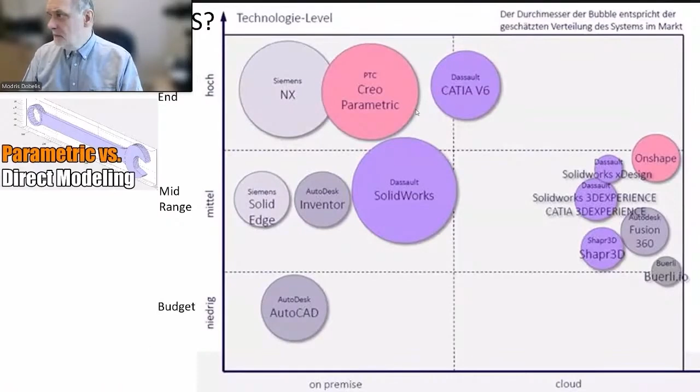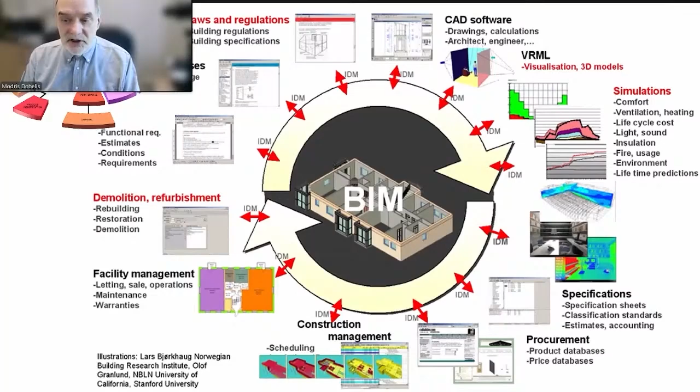Concurrent engineering SolidWorks performs like BIM, using a single shared model for real-time cooperation, coordinated updates and conflict detection, what engineers generally call PLM, product lifecycle management.

The widespread adoption of practical application of PLM and BIM models across engineering disciplines will not only streamline design and collaboration, but will also fundamentally shape how products are developed, managed, and brought to market, ultimately defining the future of industry.

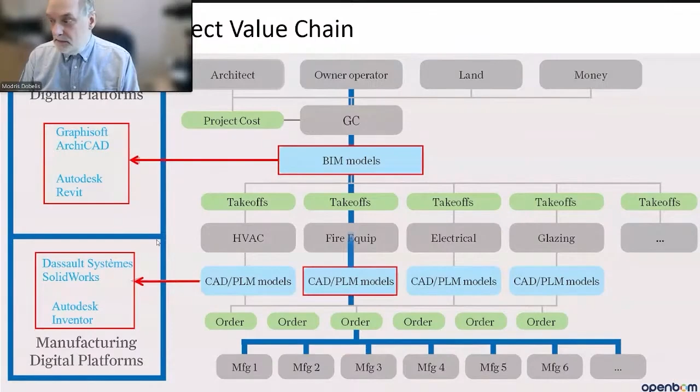At RTU, we use SolidWorks to introduce students to the cause and effect relationship between design decisions and real-world performance. Every modeling choice, dimensions, constraints, symmetry, or simplifications has consequences later in analysis, manufacturing, or operation.

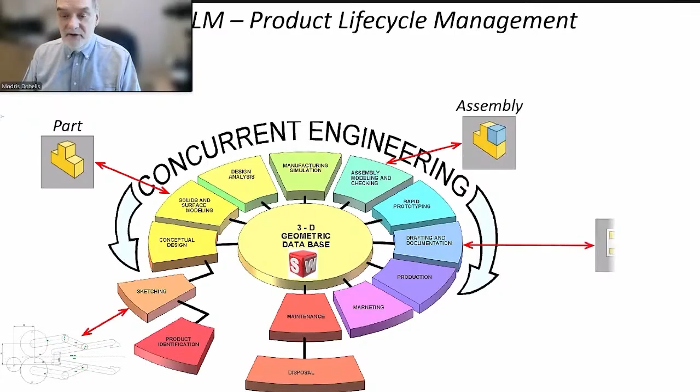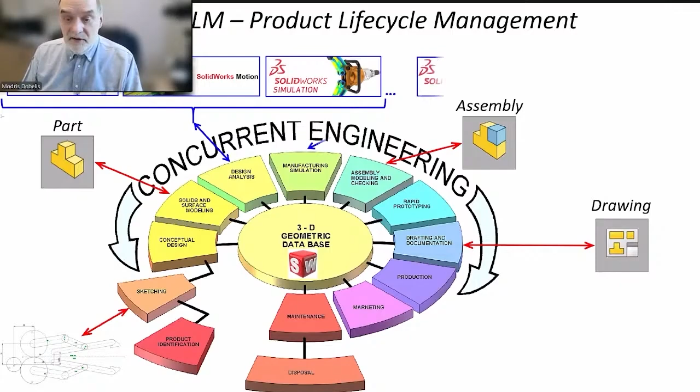Another key reason for using SolidWorks is continuity. The same model created in a basic CAD course can later be reused for structural analysis, flow simulation, and parametric studies. This allows students to understand that engineering is not a sequence of isolated subjects, but a connected workflow where modeling, simulation, and validation are tightly linked.

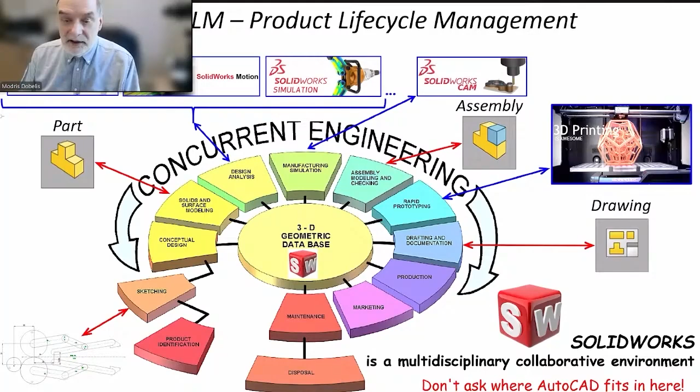Finally, SolidWorks is widely used in local industry, which makes it an effective bridge between academic and real engineering practice. Students are not only learning concepts, they are learning them in an environment they are likely to encounter again in their professional careers.

The introductory overview course is offered to about 200 students each year across 6 study programs. Students first encounter fundamentals of engineering graphics and the basics of SolidWorks.

In the advanced course, the focus is on parametric part modeling, assemblies, and documentation. Advanced SolidWorks I deliver to 60 students, and this course follows a detailed prerequisite course on engineering graphics. Here students, along with SolidWorks, progress to learn assembly, structure, and design intent, proper use of mates and constraints, and engineering drawing that follows standards and manufacturing logic.

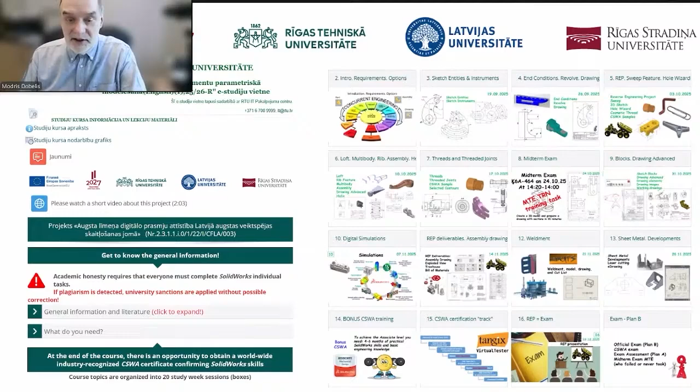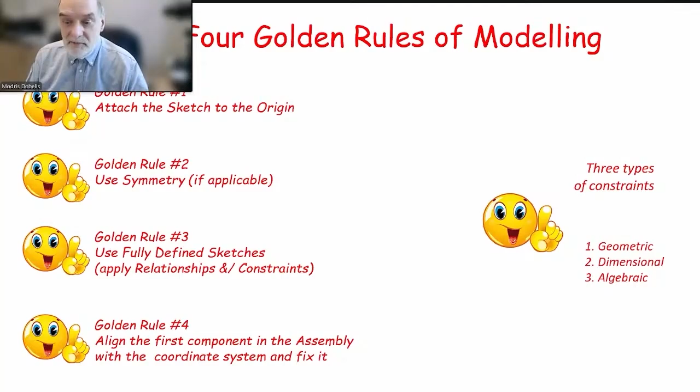A key transition happens when students move from simply creating geometry to understanding why a model is built in a certain way. Here emphasis is placed on model robustness, clear feature structure, and future use of the model for simulation and modification. This approach intentionally prepares students for later courses where the same SolidWorks models are not rebuilt from scratch but extended into analysis and simulation tasks. In this way, SolidWorks becomes a continuous learning platform rather than a one-time software skill.

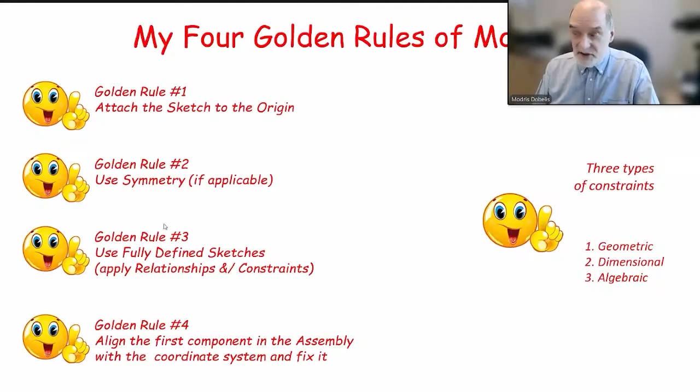I use the following teaching method. Practical exercises are conducted simultaneously in 2 computer labs of 30 seats each, as RTU does not have a single lab with 80 to 100 seats, unlike a friend of mine, a professor in Germany.

I present short theoretical concepts in PowerPoint, stream them to the second lab via Zoom, and record them for later review. Both labs have 2 large screens, and in the second lab, a colleague assists me.

I use a flipped classroom approach. The students are required to watch instructional videos before the session and then work independently in class on exercises.

I manage the computers in both labs using Veyon software, taking control whenever a student encounters a problem to demonstrate the solution. Usually, if one has the question, several others do too. Then I take control of the student's screen and share it on both classes, demonstrating the solution without wasting time to walk to the student's seat.

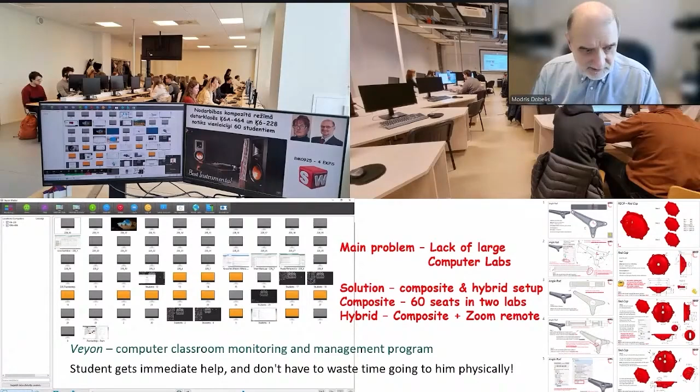Something is wrong with... so here is the class I showed before, and somehow the synchronization doesn't work well for me. Sorry.

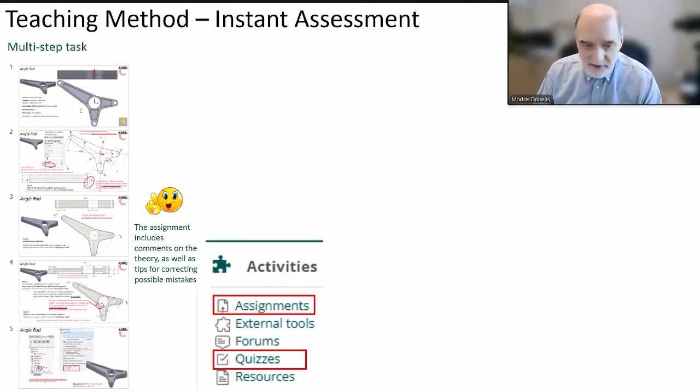Final goal for the task they have to master is to prove control over the design intent. In the first, easiest step, students are given typically 4 answers, and they have to choose the correct one from the 4. Those who are not patient may submit the solution, but they just get partial credit.

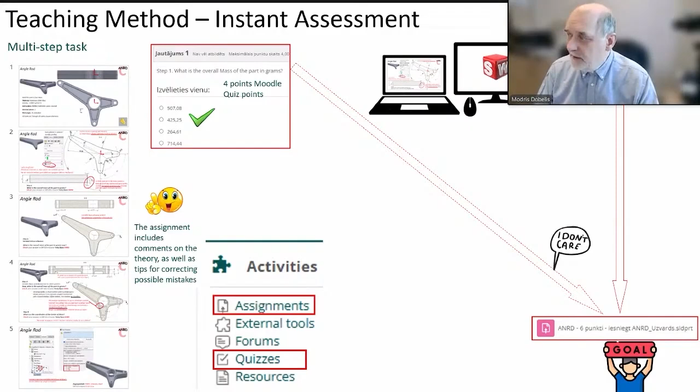For the serious students, they need to work constantly on this problem in several steps to solve the problem by themselves. The goal is to let the students practice to master design intent by themselves. The Moodle quiz serves purely for self-assessment. The teacher is built into this Moodle system.

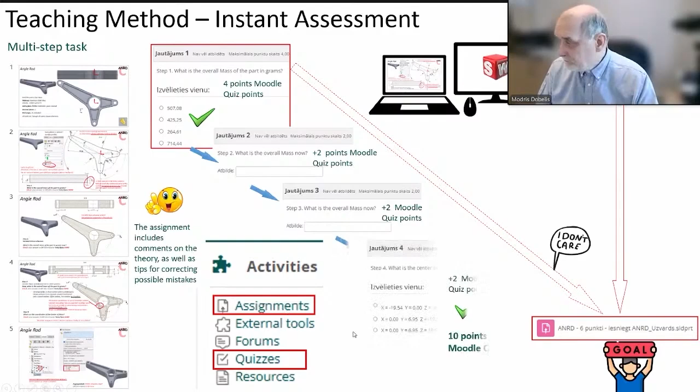At RTU, SolidWorks is primarily used for learning and concept understanding. Models are simplified, assumptions are discussed, and results demonstrate just basic principles. In industry, models are more complex and must be robust, reusable, and clearly documented to support simulation, manufacturing, and decision-making.

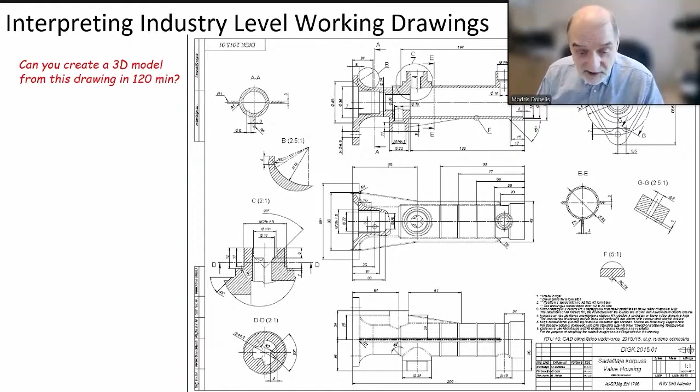Historically, industry representatives have sometimes complained about our graduates having poor skills in interpreting mechanical engineering drawings. Partially, it was caused by decades of limited funding for PCs and CAD software, as well as university curriculum changes after Latvia regained independence. 10 years ago, we still held so-called CAD Olympic contests to challenge students with more industry-like tasks. But today, such contests are too complex to run at all.

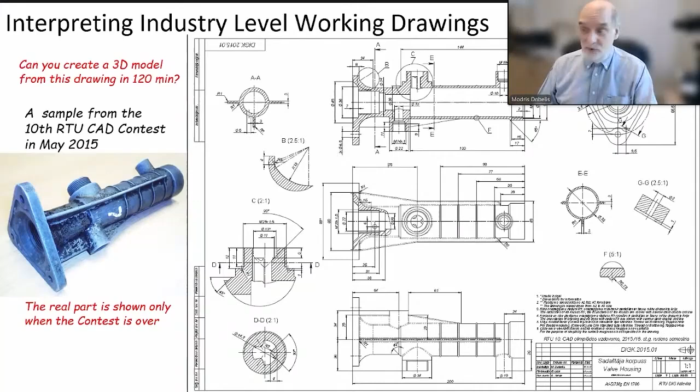To extend the impact beyond the university, the current course is being duplicated on an open MOOC platform. Its purpose is to lower the entry barrier, spark interest, and guide motivated learners toward more advanced lifelong learning programs. At the university, they have to subscribe for these later.

In recent years, RTU has organized free introductory courses with several EuroCC project initiatives. These courses are not only focused on CAD skills, but also on motivating engineers from the industry and students to use HPC resources for large-scale simulation tasks. Some industry-inspired examples from these activities I will demonstrate in my lecture tomorrow.

One practical way to align academic training with industry expectations is through SolidWorks certification. Certifications like CSWA and CSWP, and simulations-focused exams, provide a clear, externally validated benchmark of skills. There is a list of 14 different exams available to RTU students thanks to the current license subscription.

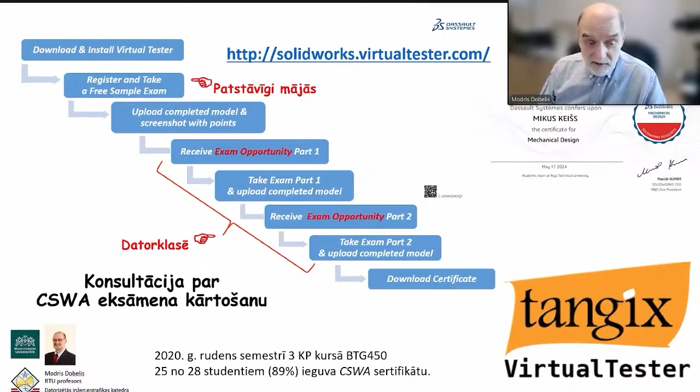From an education perspective, certification also benefits instructors by providing a clear target competence level, objective feedback on learning outcomes, and a shared language when discussing skills with industry partners.

A straightforward practical approach to parametric feature-based modeling. I was surprised that industry representatives who already work with SOLIDWORKS daily are still willing to take the time to prepare for the CSWA certification exam.

To conclude, I would like to return to the main message of this presentation. SOLIDWORKS becomes truly valuable in engineering education when it is used not only to create geometry, but to support reasoning, analysis, and decision-making. By integrating modeling, simulation, and certification into the curriculum, we can better prepare students for real industrial workflows.

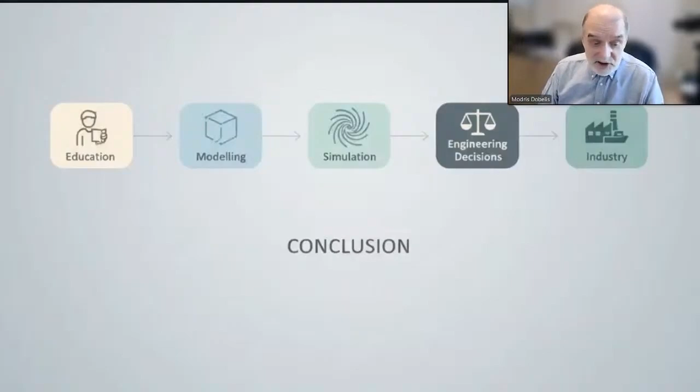From an educational perspective, the key is consistency. Consistent tools, consistent methodology, and consistent expectations aligned with industry practice. Thank you, and I look forward to continuing this discussion tomorrow from a more technical, hands-on perspective.

Sorry for the technical problems while switching these slides. There was some problem with my Zoom.

Thanks a lot, we really appreciate your talk, and this is again what we need for understanding at the beginning of the work for next talks. Maybe some questions, and just to be sure I understand correctly: in Riga Technical University, you have a main course for students, and also this course is available for non-students as well. Is it right?

That's correct, yes. They are organized within other projects, some shorter courses and extended courses, like you saw before, 16 weeks or just 4 days. Most important is that these courses are free of charge, even for non-students, so yes, that's correct. But they usually are organized just once a year, depending on interest from industry.

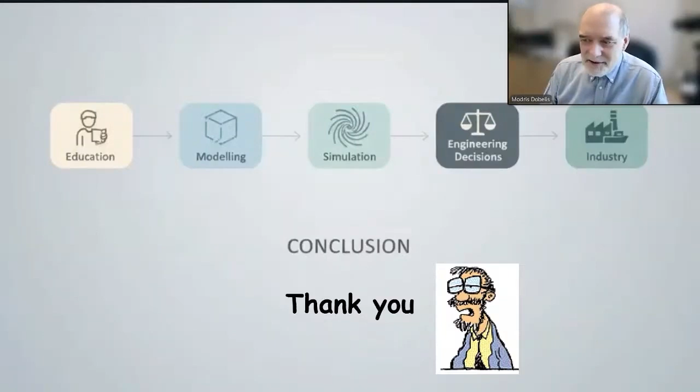Yeah, that's an interesting question to work on. I have not studied this. Sorry. Okay, but thanks a lot. Thanks again.